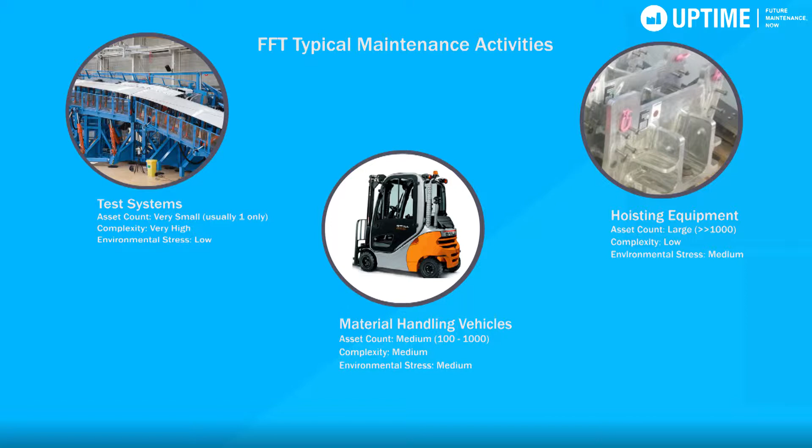Our typical maintenance activities range from the maintenance of test systems, material handling vehicles, hoisting equipment, and also transportation jigs. For the Uptime case, we have chosen the transportation jigs as a business case.

What typically makes the transportation jig difficult to maintain and repair is that it's subjected to different modes of transport: river transport, road transport, and even air transport. It is highly mobile, which means that the location where the maintenance is done is only visited by this asset for a short time during its complete transportation cycle.

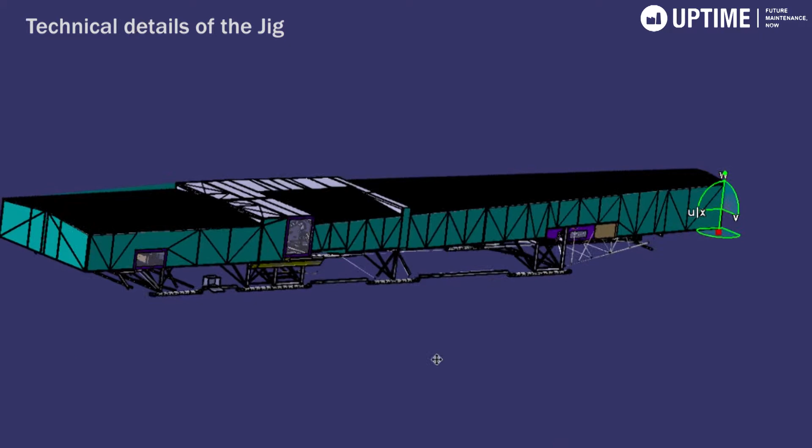It's a complex structure which is used to transport large flexible aircraft parts, but with a high requirement for deformation and external loads. That is why the jig itself is quite complex, but this also means that it can be sensitive to environmental influences.

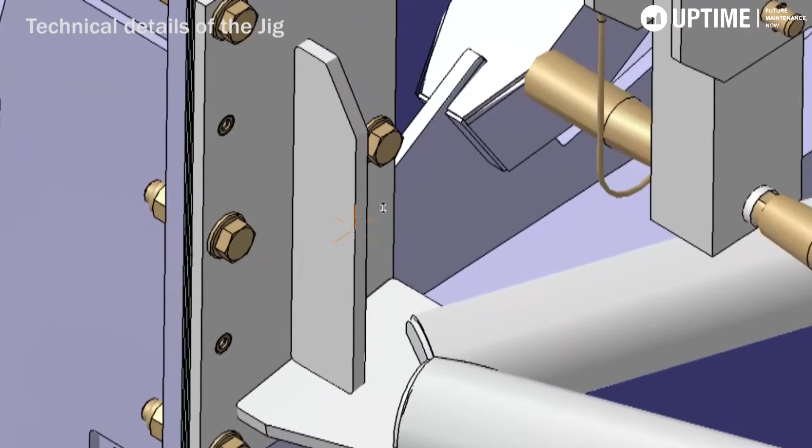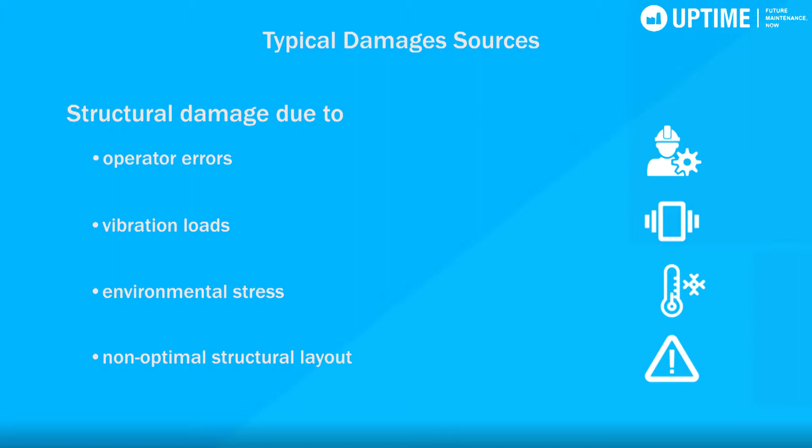What we found is that our jig, you can see a few details in the pictures, has a few sensitivities which lead to structural topics. Typical damage sources include structural damage due to operator errors, collisions, overloading, structure damage due to vibration, environmental stress, temperature, ice, and of course also some room for optimization in the structure itself, in the design of the structure.

Observed failure modes include cracks in welded joints, structural plastic deformation, and surface damage, possibly also due to repeated friction and parts colliding with other parts, and damage due to freezing of water.

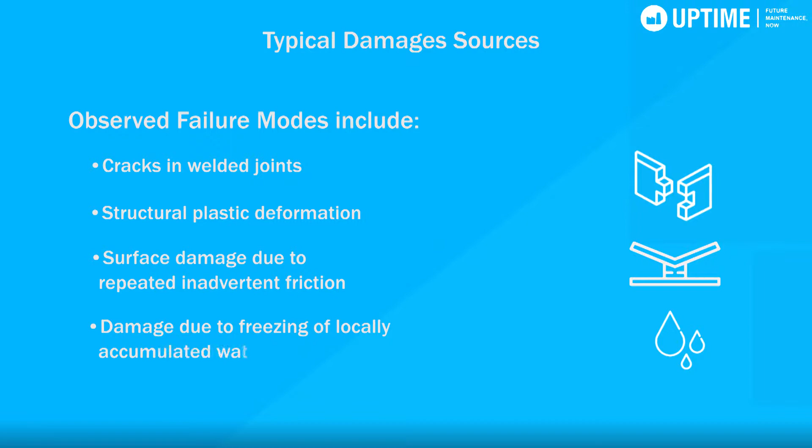The current maintenance process is actually quite traditional. It is based on manual checks, manual reaction to the check results, reactive maintenance. Also manual coordination of the reporting and the manual making of the reports in general as well.

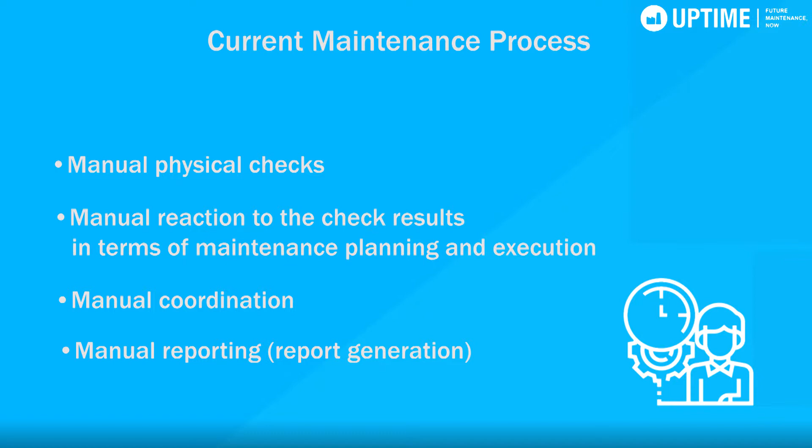What we expect from Uptime is that it really brings a strong benefit in terms of efficiency and effectiveness, but also in terms of quality, by automating the whole maintenance process or the whole data process. It starts with data acquisition, which is the automatic measurement, and then the assessment of the data: what does it mean, what do we have to do because of this, and then also presenting the results to the customer and to our other stakeholders.